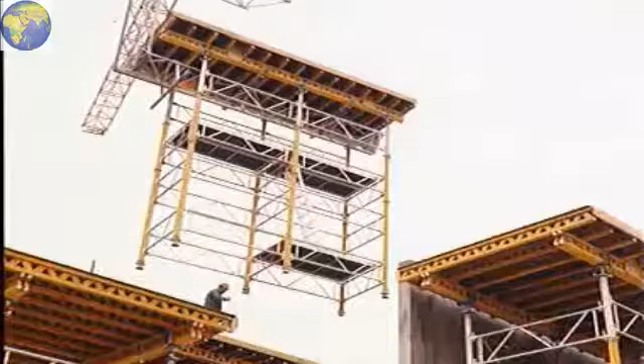Peri offers the right slab formwork for any site. Skydeck, the quick and extremely light aluminium panel formwork when fast shuttering is crucial. The Peri table form systems, Uniportal, PD8 or Multiprop when you have a high level of repetition and open construction.

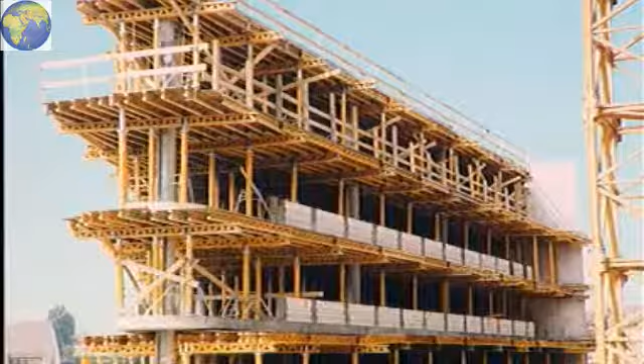And Multiflex, the flexible and adaptable girder slab formwork for any layout, any height and any slab depth. Multiflex is optimized for individual projects to make it particularly efficient and cost-effective.

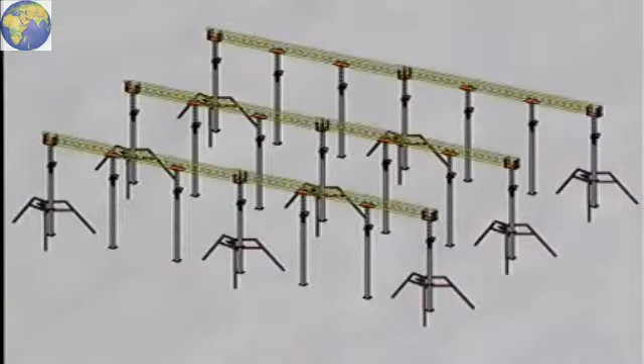Multiflex is a modular system. It consists of props with accessories, main girders, secondary girders and plywood.

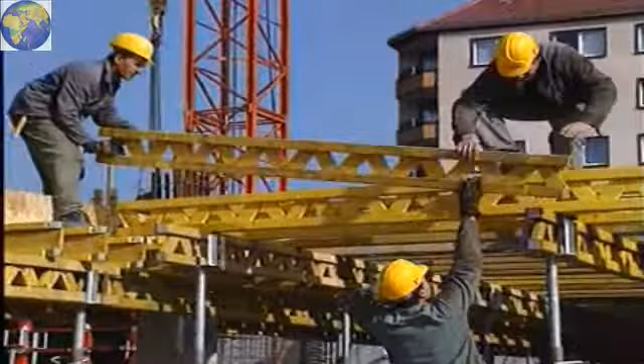The GT24, which is noted for its high load capacity, long life and low weight, is used as girder, or a solid formwork girder like the VT20K, which, thanks to its high-grade web board and the steel end caps, guarantees a high degree of rigidity.

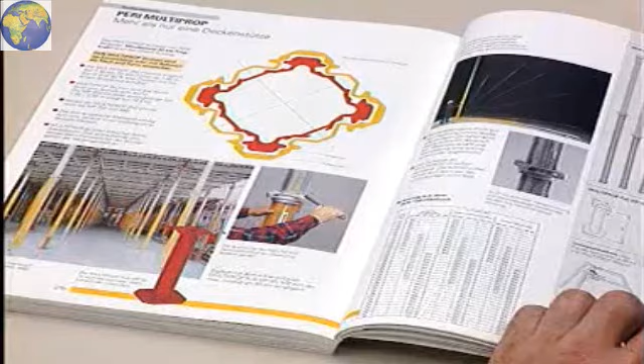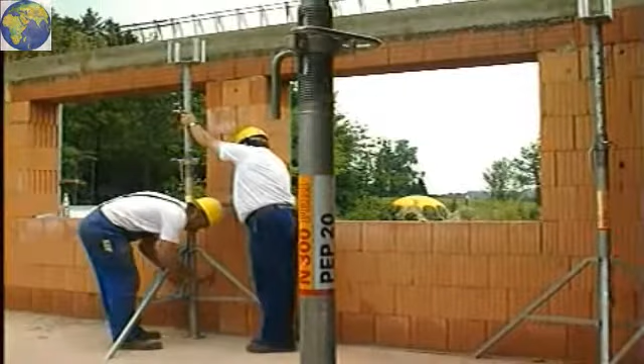Peri also makes it easier to choose props. The PEP prop, with its constant load capacity and low weight, allows efficient work. In the case of the Multiprop, you have an aluminium design that can be used as an individual prop or combined with frames to form a table or tower.

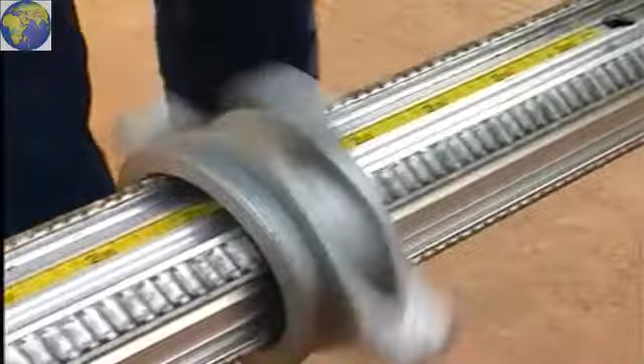The built-in measuring tape and free-running nut allow rapid pre-adjustment. Low weight and consistently high load capacity make the Multiprop very economical.

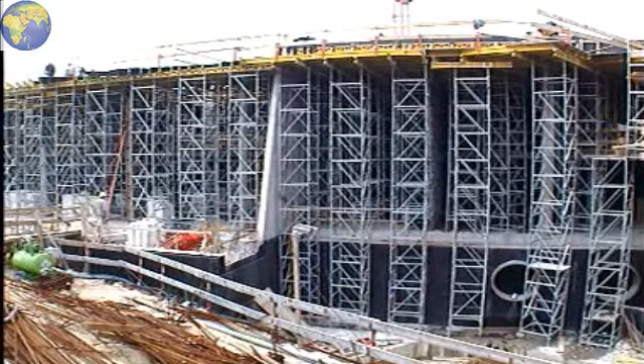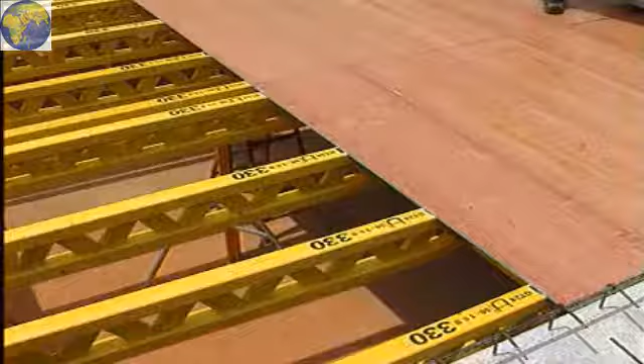With deep or particularly high slabs, the ST100 stacking tower or the Multiprop tower is used as support. Incidentally, the Multiflex is also used to support precast plank slabs. We'll now show you how you can plan, erect and strike Peri Multiflex and construct stop ends and beam formwork.

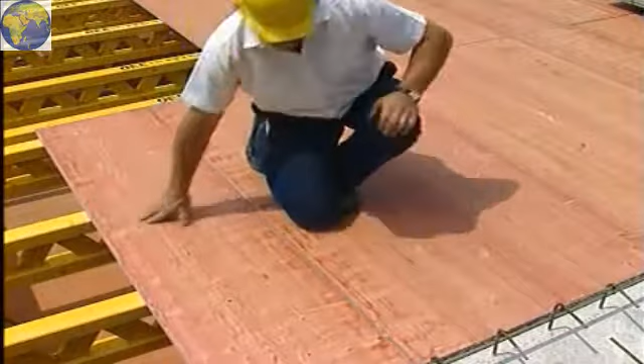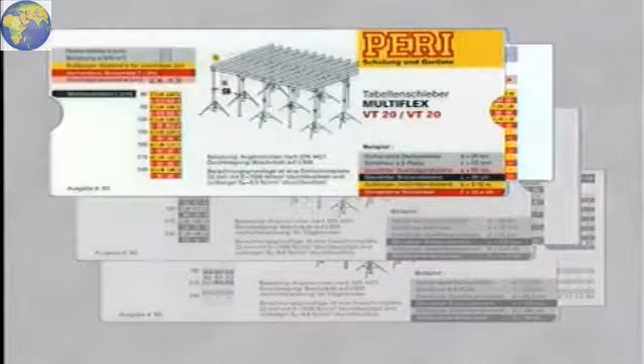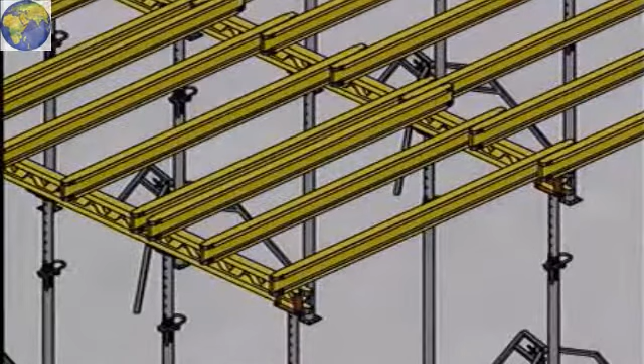The table slide rules are used to plan quickly and easily on site. There are three versions. VT20 as main and secondary girders. VT20 as secondary, GT24 as main girders. And GT24 as main and secondary girders.

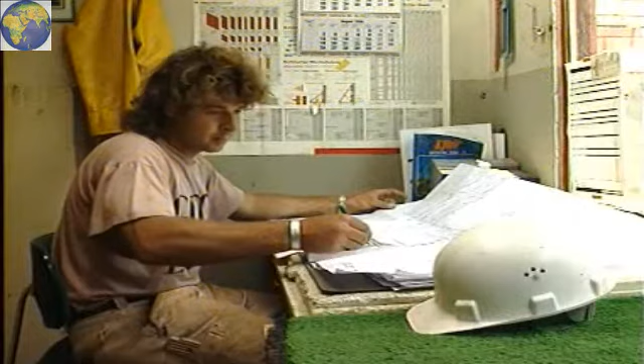For the following example, with GT24 as main and secondary girders, the slab depth has been set on 20 centimeters. The size and thickness of the plywood determines the spacing of the secondary beams. In this case, 62.5 centimeters. If a prop spacing of 150 centimeters is chosen, the permissible main girder spacing is 2.65 meters.

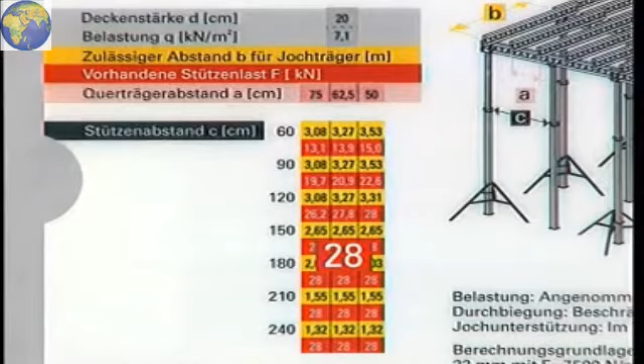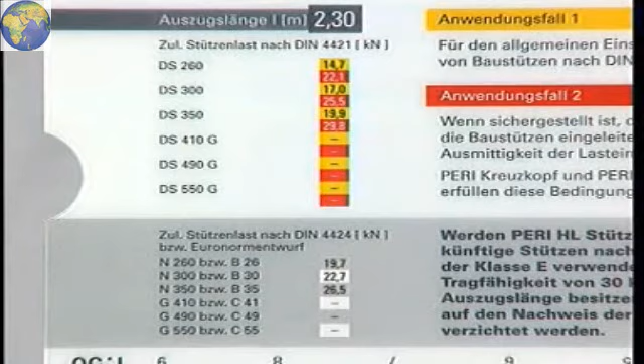The actual prop load of 28 kilonewtons can now be read off under the yellow 2.65. This is also the GT24's maximum reaction force. On the back of the slide rule is the prop table. When using DIN props, the extended height, 2.30 meters in this example, must now be used to determine the size required. A DS350 is needed.

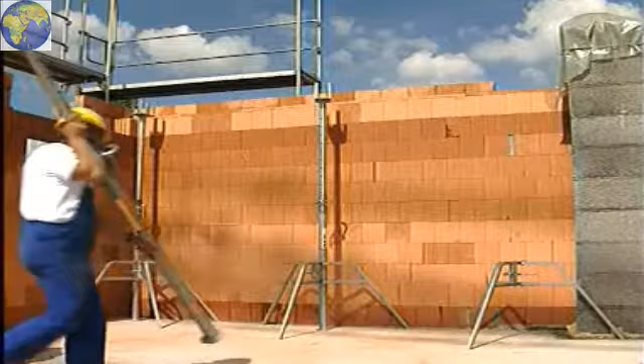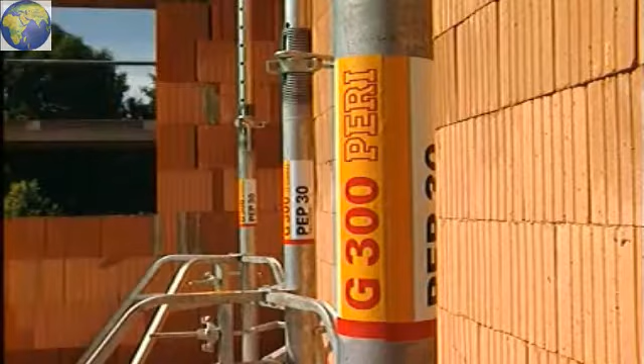With the PEP prop, everything is much simpler. Its constant load capacity over the whole extended range makes the choice much easier. The PEP 30, with a load capacity of 30 kilonewtons, is being used. If shuttering is being carried out with the Multiprop, it's only its extended height that still plays a role. Its load capacity is always sufficient.

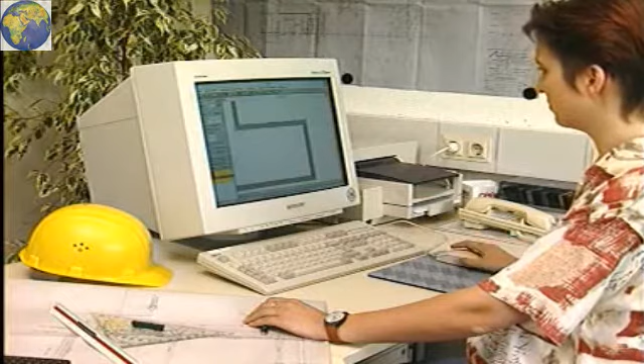And routine planning is even simpler with PERI ELPOS software. The layout is entered in the usual way. If the wall formwork has already been planned beforehand, the layout is simply adopted for slab shuttering. The depth of the slab and clear height are entered first. The girders and their lengths and the size of the form lining can now be specified in the basic settings.

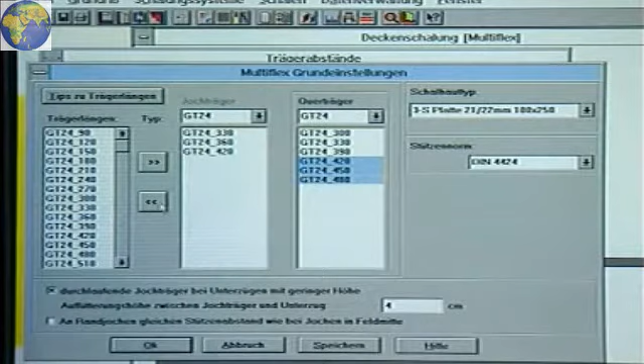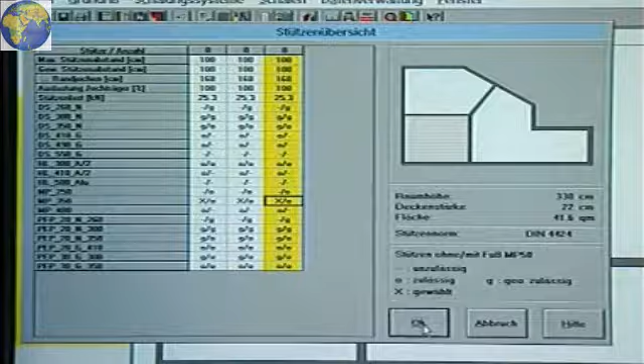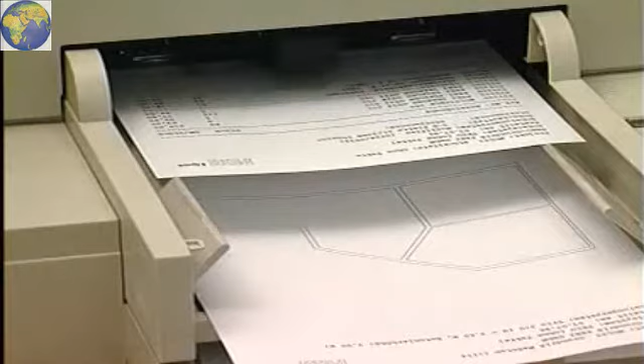The only thing left to process is the props list. ELPOS specifies which props can be used. When shuttering, ELPOS takes account of all the structural values required. The result is something to be proud of, an accurate parts list for the yard and an exact formwork plan for the site. Planning only has to be carried out once to minimize the time taken for shuttering and the cost of equipment.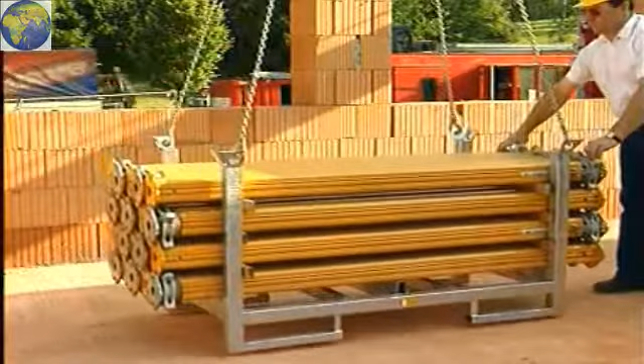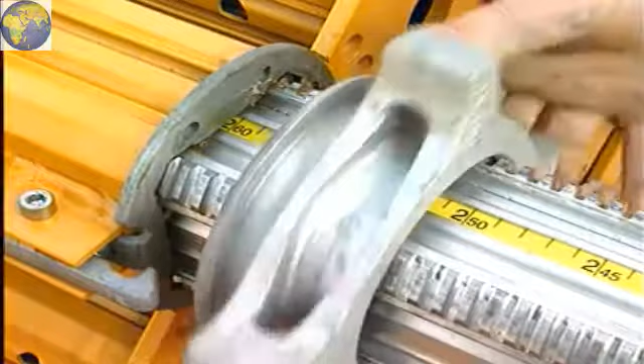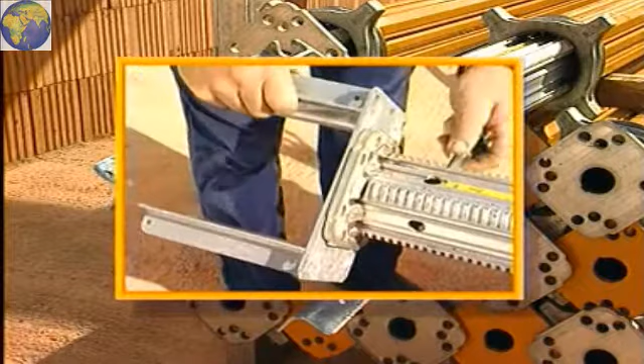The shuttering equipment is delivered to the site in pallets. Shuttering starts with adjusting the props to the height required. The Multiprop's built-in measuring tape makes this particularly easy. The fork head with self-locking coupling is simply inserted into the prop. Fork heads without self-locking coupling have to be secured with pins.

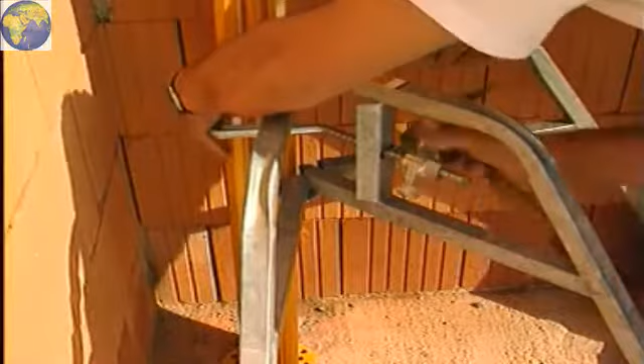The first prop can be erected. It's stabilized with a tripod to prevent it falling over. Further fork head props are set out and erected. The tripod is basically only an erection aid here. It can transfer horizontal loads from forms at a height of up to 3 meters.

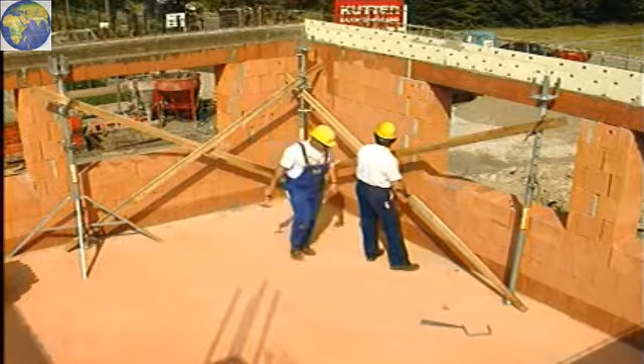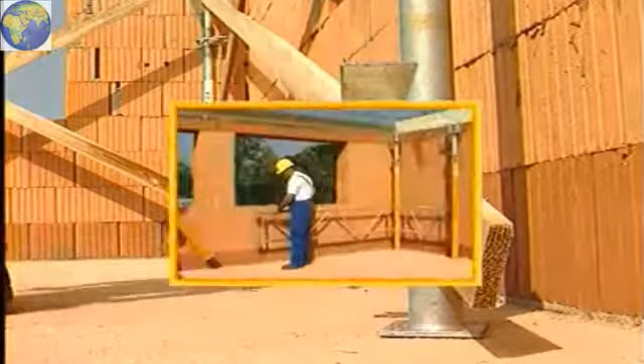Greater heights make it necessary to fit bracing to transfer the horizontal forces. Peri offers brace clamps to secure diagonal boards for this purpose. If Multiprops are being used, the bracing can also take the form of Multiprop frames. The remaining fork head props are erected.

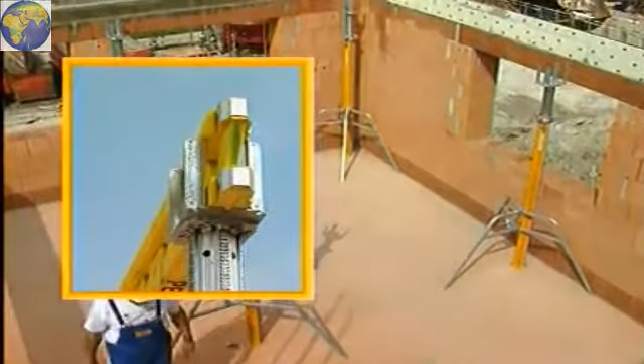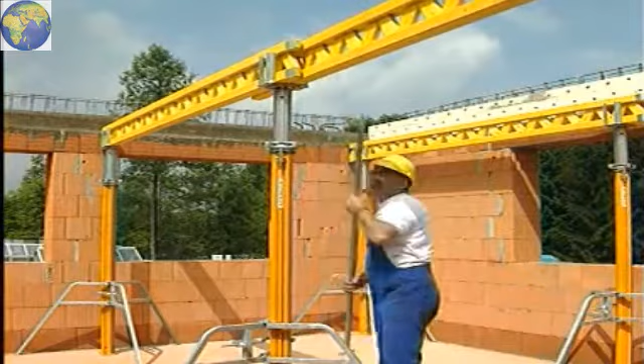The Multiflex fork head holds 1 or 2 girders so that they cannot tilt. The main girders can now be positioned. This is carried out with the erection bar when they're within reach from the slab. The secondary girders are then laid on at the spacing chosen. The erection bar is of service here as well.

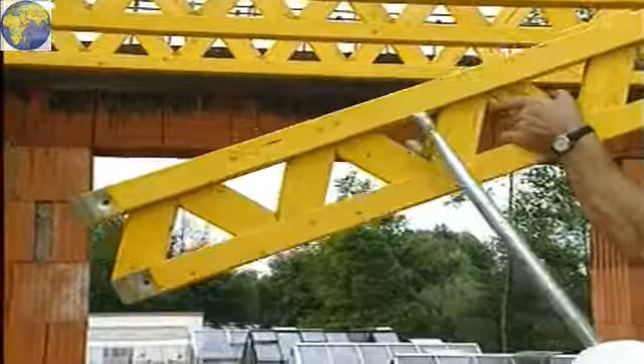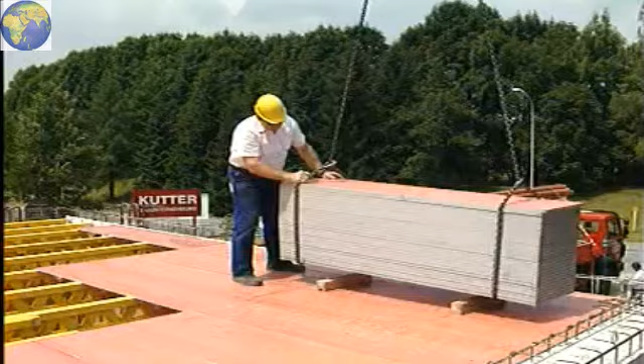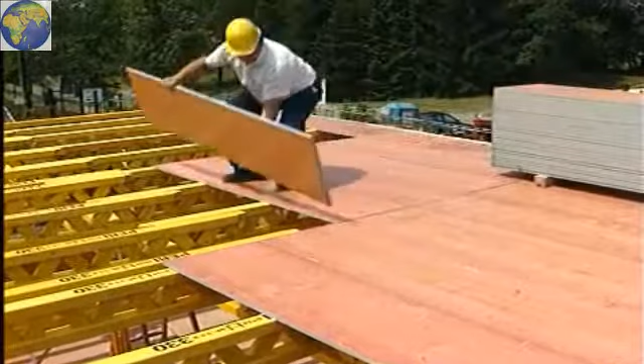To make cleaning and striking easy, Peri recommends spraying the sheets of plywood all round with Peri Bio Clean. The stack of plywood can be deposited on top with the crane as soon as a large enough area has been shuttered. To safeguard against the secondary beams tilting, the individual sheets of plywood must be nailed down.

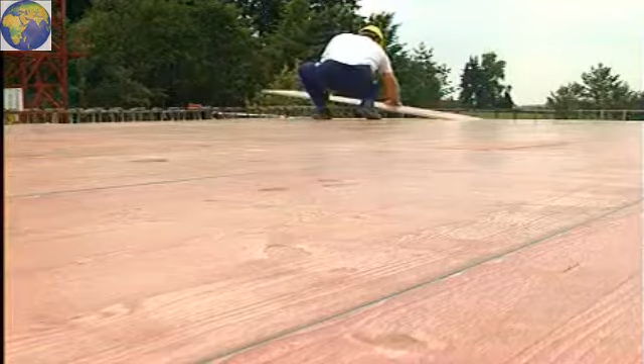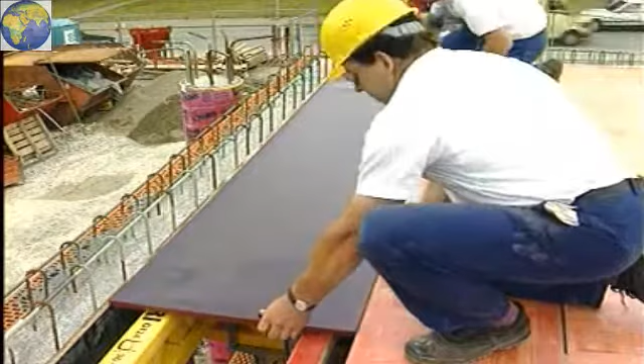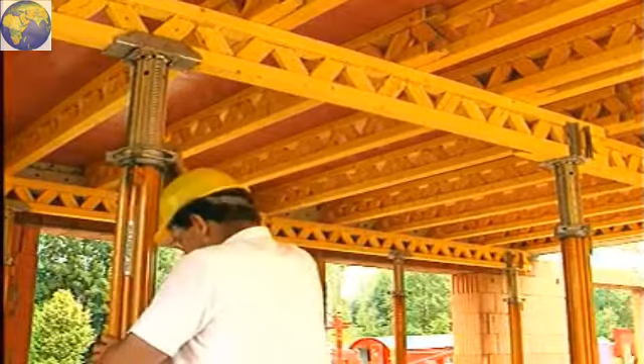Longitudinal and transverse infilling is quick and easy with Multiflex. The formwork is now levelled. This can be carried out by one person. Intermediate props must be erected at the spacing required. Only after this has been completed may reinforcement or other heavy loads be set down on the formwork.

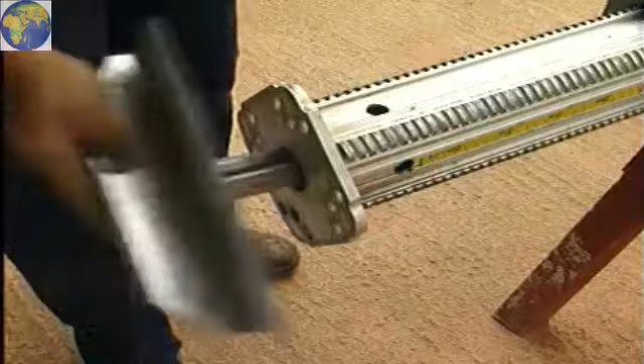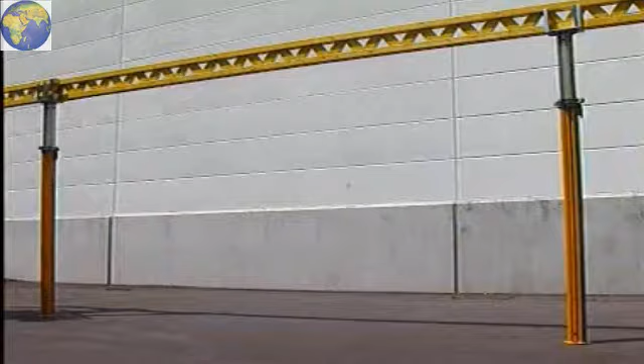The claw head also has a self-locking coupling and only has to be inserted. It makes it unnecessary to secure intermediate props by nailing. The 50cm spacing of the GT24's joints makes the work much easier. All you have to do is count them. This enables you to check quickly and without measuring whether all props have been erected at the right spacing.

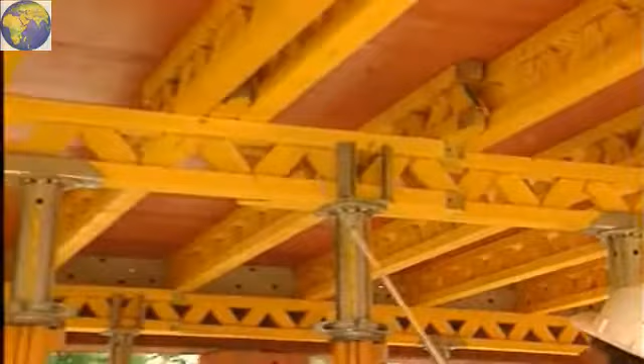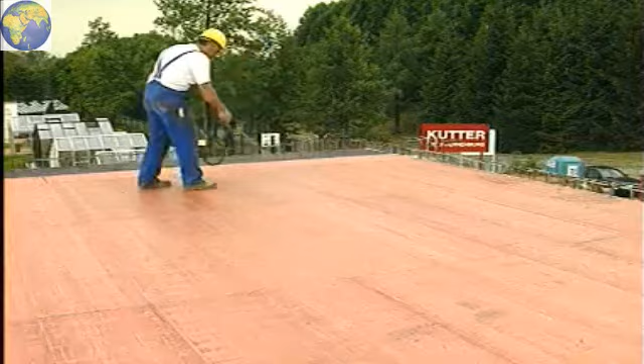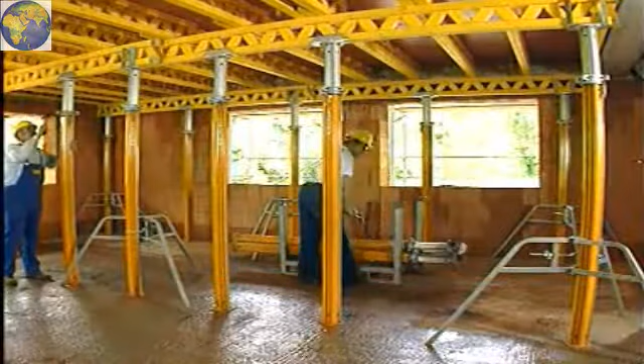Incidentally, with the claw head, the GT24 can be supported at any point while still transferring the full load. After spraying, the formwork is finished and steel fixing and concreting can be carried out. Once the concrete attains the strength required, the formwork is struck. This begins with removal of the intermediate props, which are stacked straight into pallets to enable them to be shifted quickly.

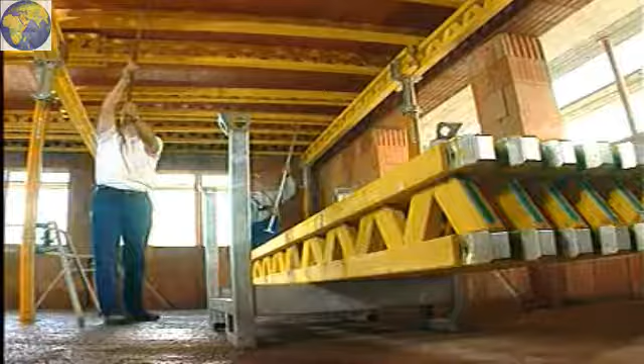The forkhead props are then lowered about 4 centimeters. The lowering head makes the process even simpler. A few hammer blows are all that's needed to lower the formwork 4 centimeters. This leaves enough room to tip the secondary girders over and remove them. The removed girders are stacked straight into pallets.

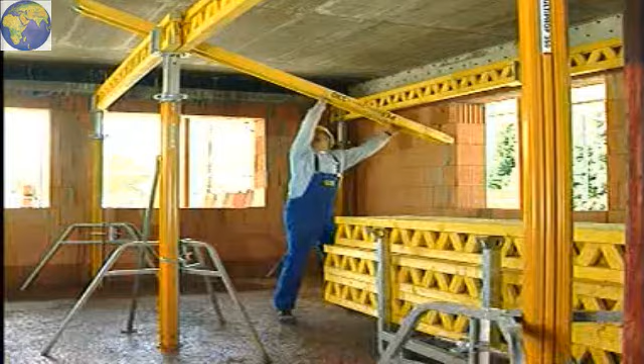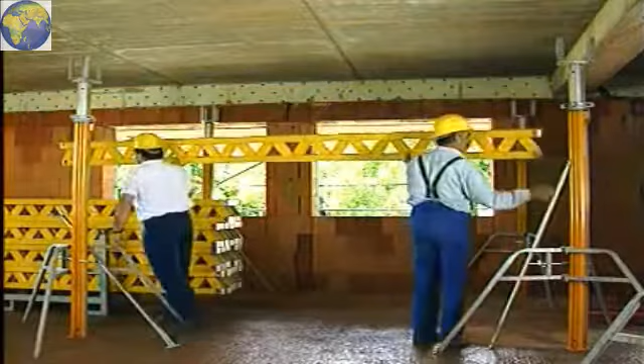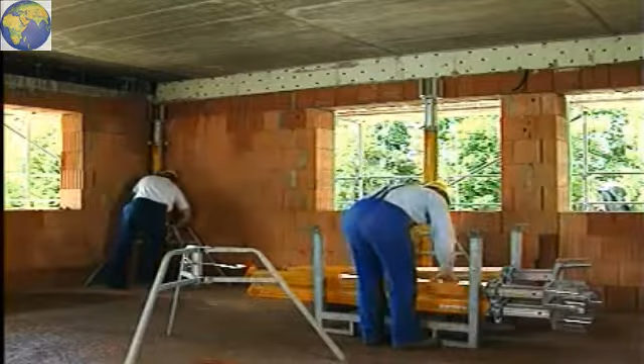The sheets of plywood can now be removed and cleaned. The remaining secondary girders are removed and the main girders taken down. The crosshead props are now removed. The Peri pallet lifter is used to move the shuttering equipment into the next section.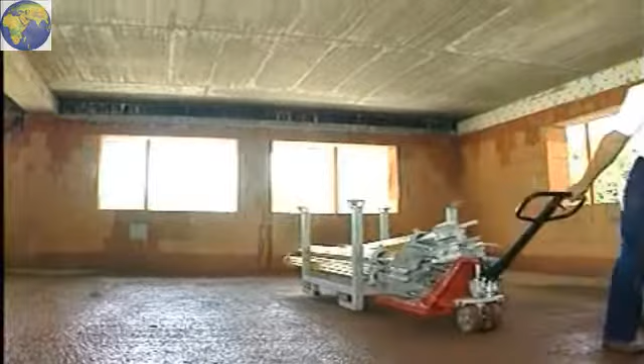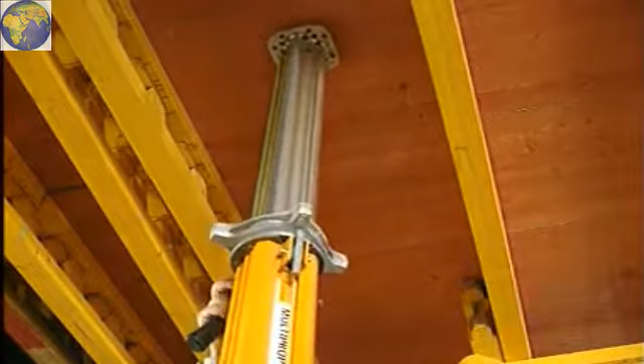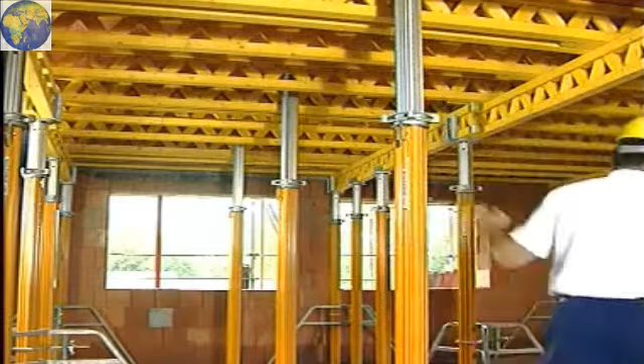For faster concreting cycles with Multiflex, temporary props have to be used. This allows earlier striking and the formwork is ready for reuse. At the start of striking, the temporary props are erected according to the structural requirements. The actual striking then corresponds to normal use. Only the temporary props remain in position.

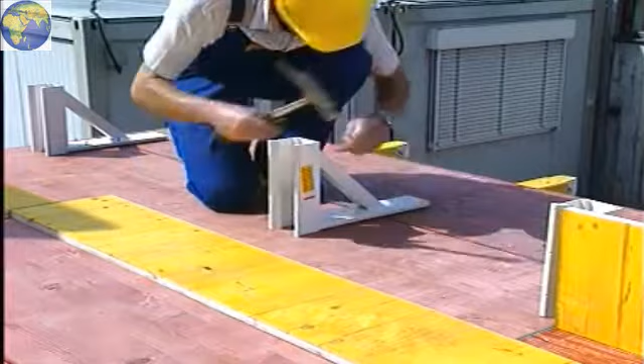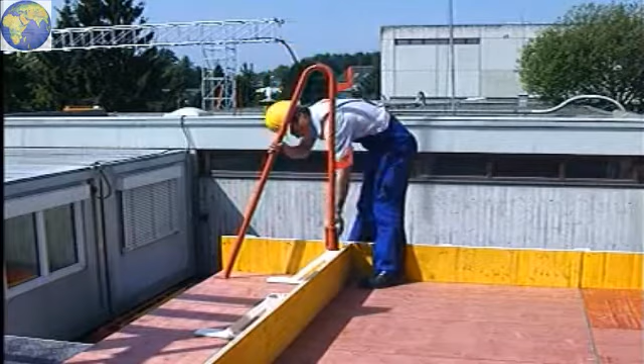Slab edges are shuttered with the Peri stop-end angle. Just nail it on and that's it. Stop ends for slabs up to 40 centimeters deep can be constructed this quickly. At the edge, the handrail post is used to erect a safety handrail system conforming to the DIN standard. Insert the posts, secure with slide, and nail down.

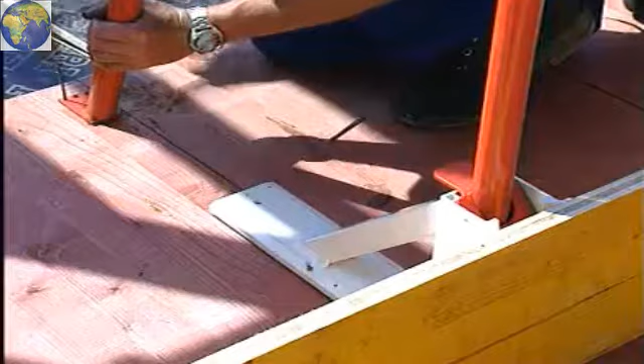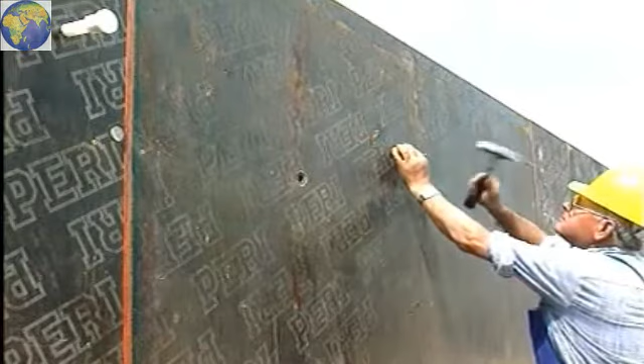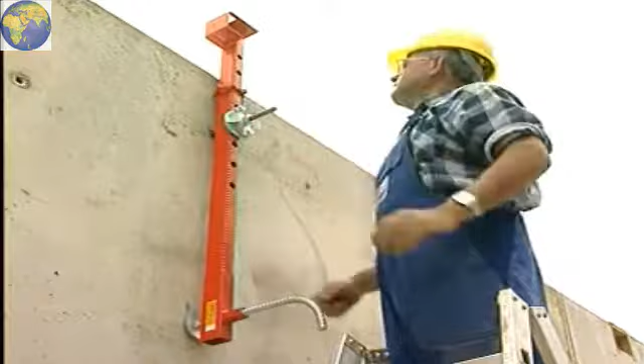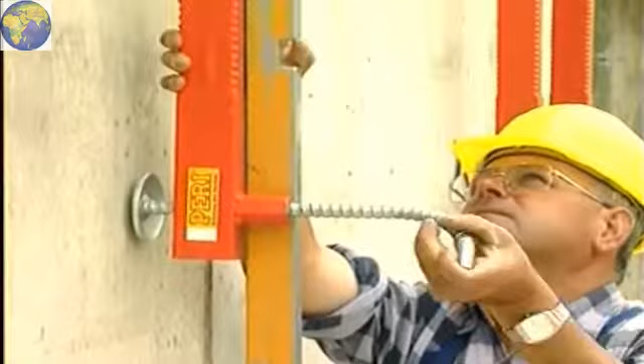The stop end bar is used for vertical stop ends up to 50 centimeters high. A stop end sleeve for this is concreted into the wall, then the tie rod screwed into it. Put stop end bar on and screw tight. The height of the stop end can be adjusted accurately with the nut provided. The spindle at the bottom end allows the stop end bar to be positioned vertically to suit the thickness of the stop end board being used.

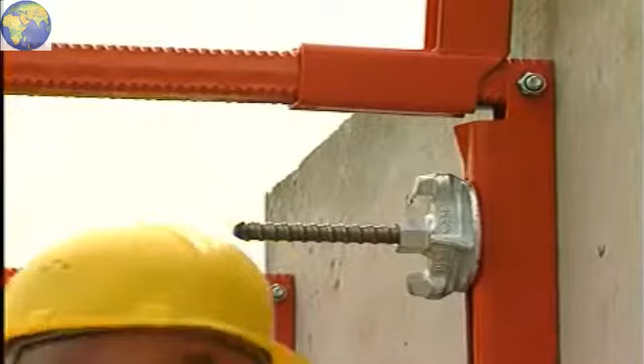For shorter slab overhangs of up to 45 centimeters, the Peri formwork bracket is used. This too is anchored to stop end sleeves cast in beforehand. The free-running nut allows the formwork to be tightened easily. The handrail posts are used to provide a safety system when using the stop-end bar and the formwork bracket.

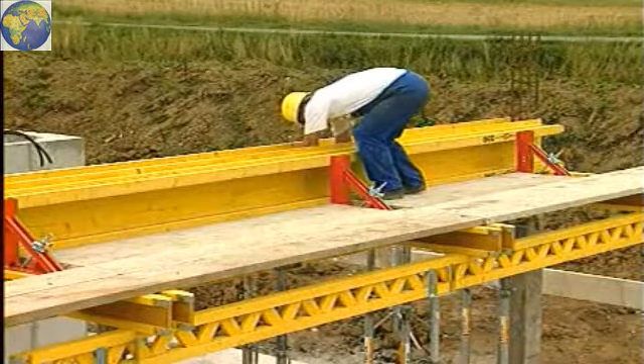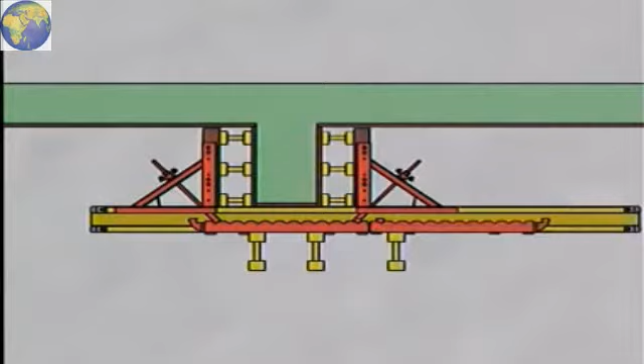With the 40 beam bracket and the beam width adjustment bar, beams of any width and depth can be shuttered. No ties are needed for beams up to 80 centimeters deep. For wider beams, the adjustment bars are simply coupled together. The beam bracket is positioned, the tie hook hooked into the beam width adjustment bar and the wing nut tightened.

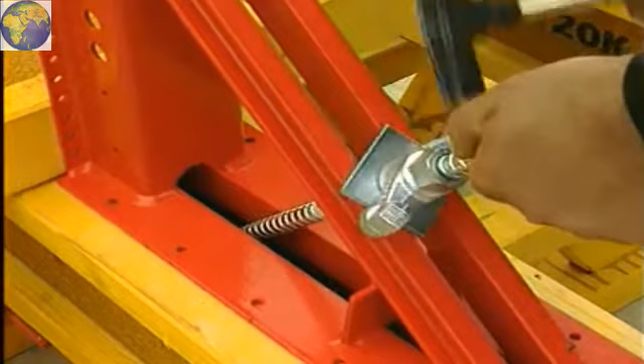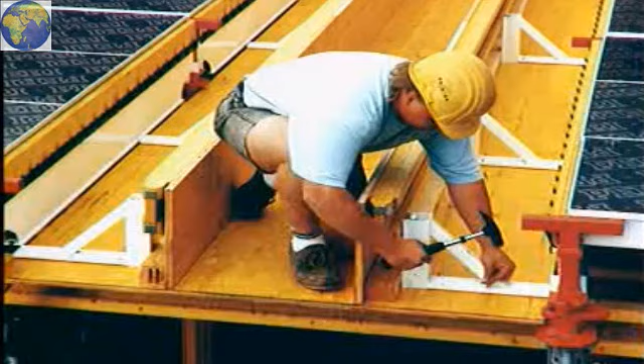Timbers, or formwork girders of different sizes, can be used as secondary beams for the 40 beam bracket. Smaller beams can also be shuttered with a stop end angle. It can be secured with a clamp on the girder or timber or nailed for shallower beams.

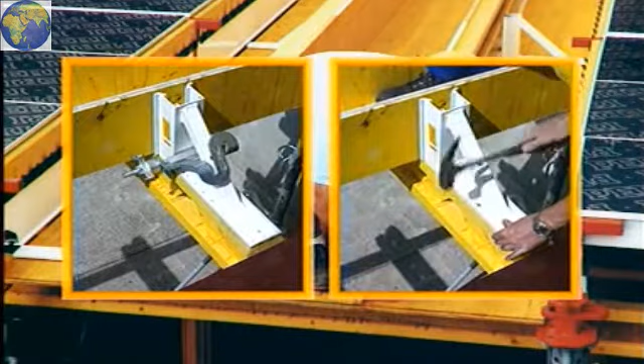You've now got to know how the Multiflex system can be used effectively from planning through to striking. We wish you every success in shuttering with Peri Multiflex, the cost-effective girder slab formwork.